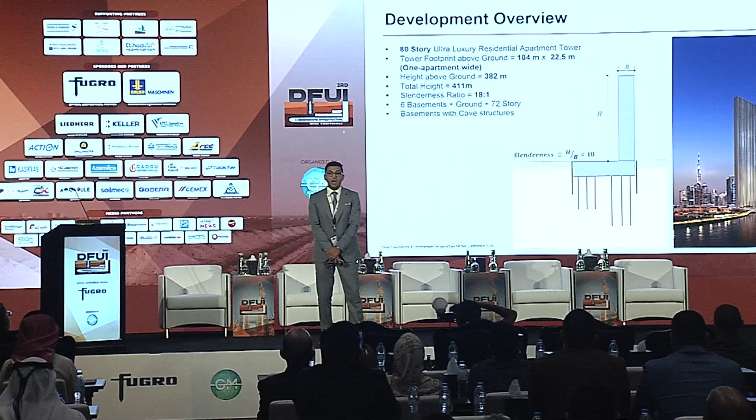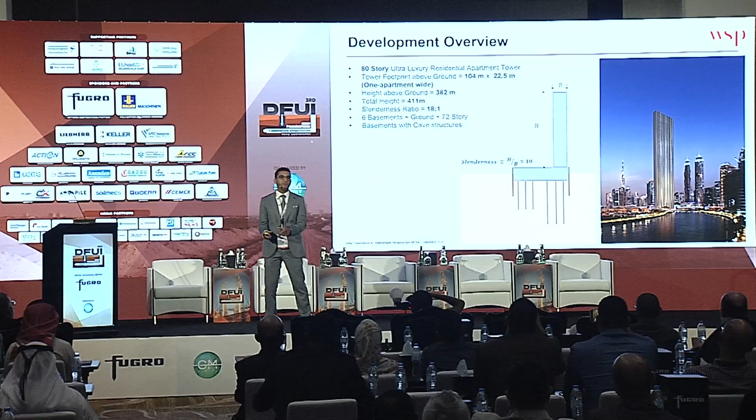As I keep saying that it's a very slender tower, let's define the slenderness, because I know this terminology isn't familiar to most of us here. From a structural perspective, slenderness is the ratio between the width of the building and its height - the height above ground level, because slenderness is actually a structural measure, not a geotech measure.

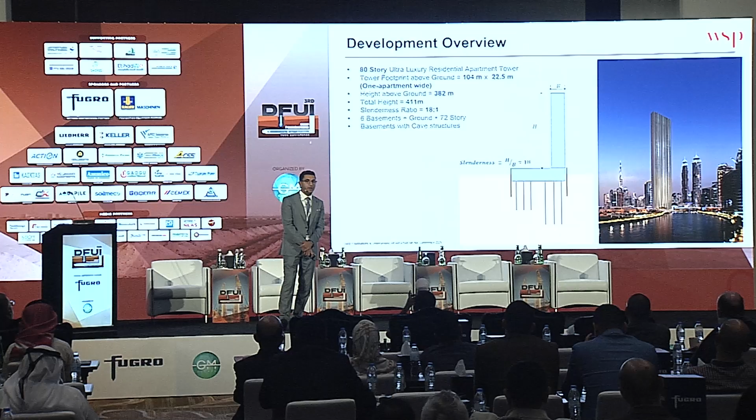So in our case here, it's 18:1. Let's put that into perspective and look at some of the key projects in the world and their slenderness ratios.

Now we move to the technical stuff. We'll start with the site-wide ground model. It's a very straightforward ground model. We were lucky as geotechnical engineers that the geology at this site was almost uniform, which isn't really the case for most projects, but we were super lucky here.

You can see that the foundation level is minus 26 meters DMD - that's the top of the raft on the right-hand side. If you look at the UCS, the unconfined compressive strength of the rock mass, it's situated in the weak rock zone.

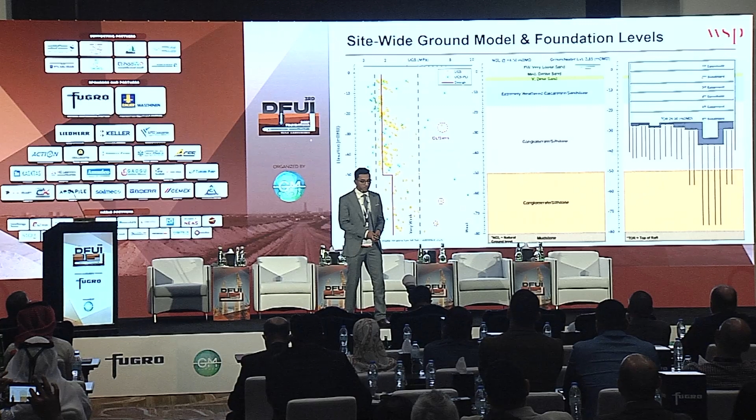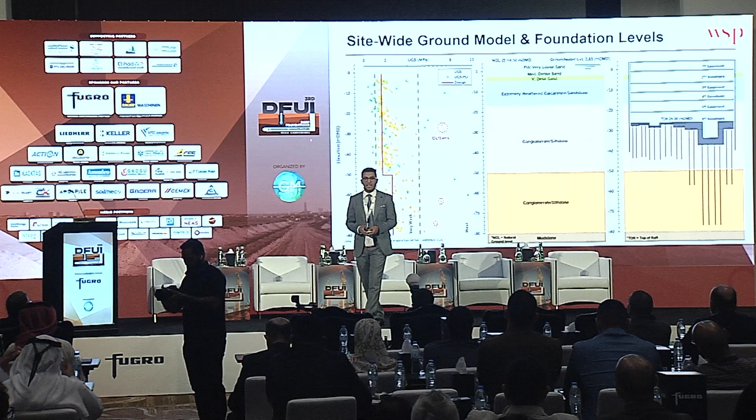So actually it's a weak rock. We're interested in 2 layers: the layer from minus 25 down to minus 50, and from minus 50 down to minus 85 and downward. Below that we're not really interested, but that's actually a very stiff mudstone layer.

So on the prelim design - it's actually a preliminary design, that's why it's handwritten - anybody who picked up that design and tried to design the foundation would of course think about the piles. Why don't we get to piles? As it's a prelim design, we need to first determine the length of the foundation we can use, and that's actually the standard practice we have here.

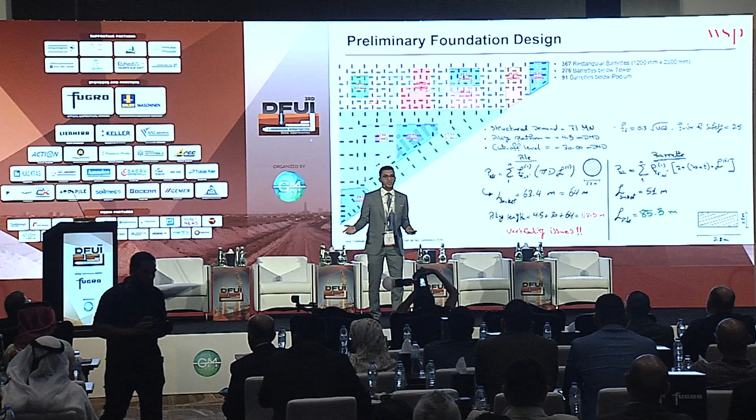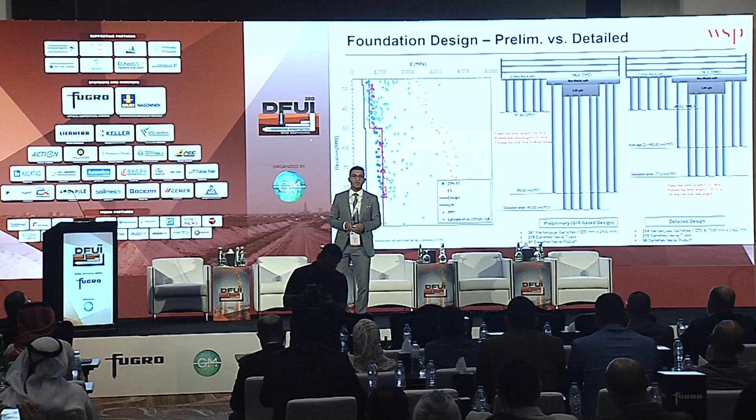This is one reason, and the other reason for going to barrettes will be explained later. In comparison between the prelim design, in the middle, and the detail design, under construction right now, on the right-hand side, you can see the prelim design has 367 barrettes, but the detail design has 314, which shows significant savings, not only in the number of barrettes, but also in the total length of the barrettes.

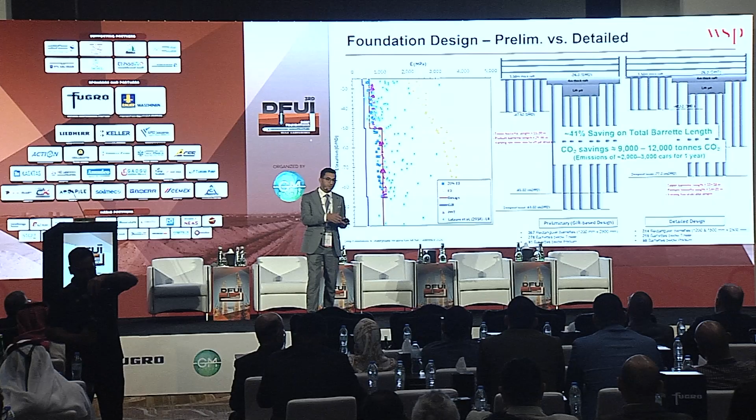In summary, we managed to achieve like a 40% reduction in the total piling or barretting length from the prelim to the detail design. Also in terms of environmental issues and carbon emissions concerns, we managed to save almost 10,000 tons of carbon emissions per year.

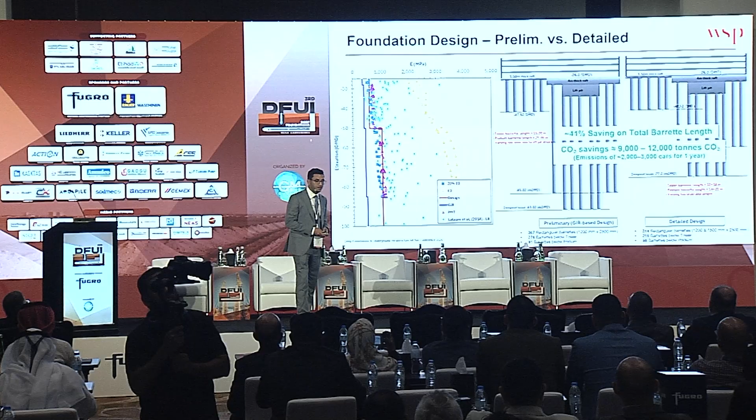So the question that can be raised right now is how we managed to achieve that, how we moved from the prelim design to the detail design, because there's a lot of savings in here.

So like many of the projects we do here in Dubai, we have PTBs. This is a mandatory requirement by the Dubai Building Code. So actually in our PTB program, we had two PTBs. We were concerned about the first PTB, which was 1,200 millimeters by 2,800 millimeters.

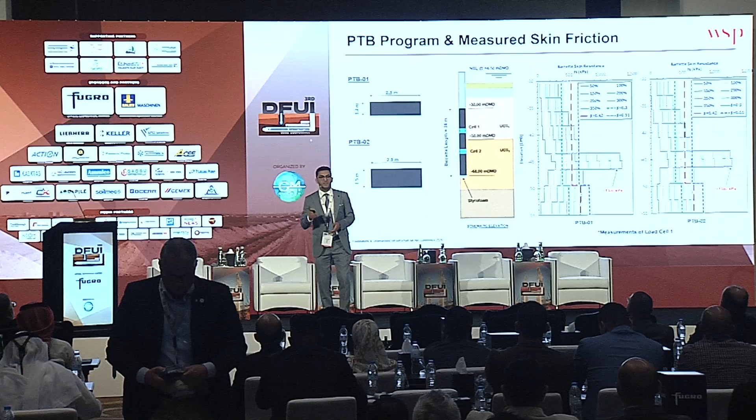We were concerned that we may encounter a certain overstressing that would require us to go for a greater barrette. So we added one barrette to the PTB program that you see here. We had two barrettes, but each one of these was instrumented using two O-cells.

And you can see on the right-hand side the measurement for load cell number 1, in the layer from minus 30 to minus 50.

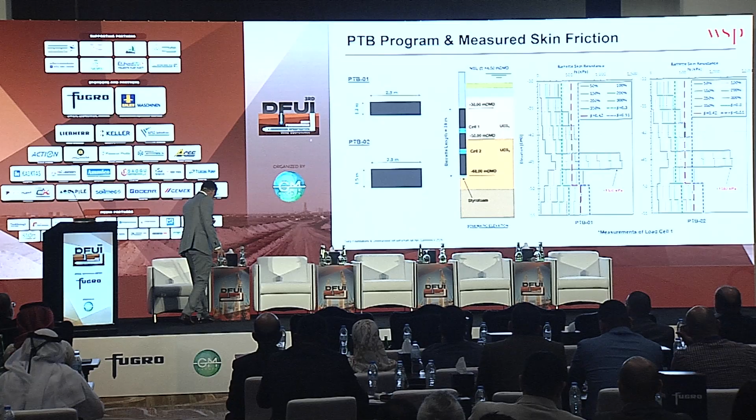Excuse me, I need to drink some water. I'm sorry. Apologies, the weather is hot and I'm kind of dehydrated. All right, so we can resume.

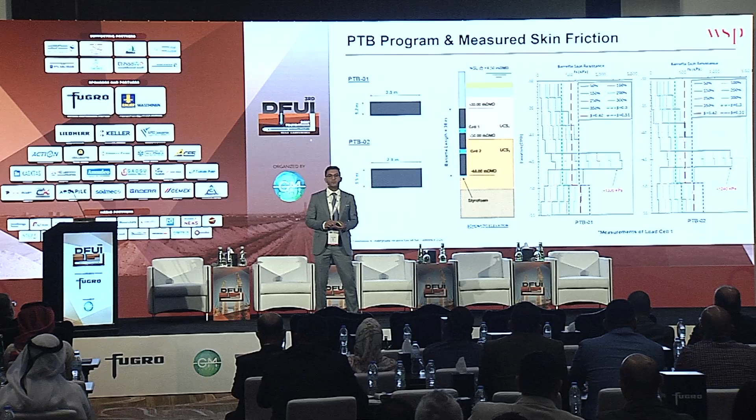So we had two PTBs on site. Each one of these was instrumented using two O-cells, and this is the raw measurements that you see. You can see that the skin friction mobilized inside is reaching 1300 and 1400, which is a very high skin friction to have mobilized on site.

I have a very long story to tell here, but I will try to summarize it as much as we can. So what you see here in red is the state of practice range for the ultimate skin frictions that most GIRs give. You can see that it's quite low compared to the maximum mobilized skin friction shown on top.

And yesterday there was a panel on over-conservatism, and this is one example of it. We cannot actually use the maximum mobilized skin friction because the mobilization of skin friction is dependent on the amount of load we have. So we had to define a state of geotechnical rupture, which is the skin friction mobilized at 300% of the load that the barrette was designed for. So these are the two points that you see here.

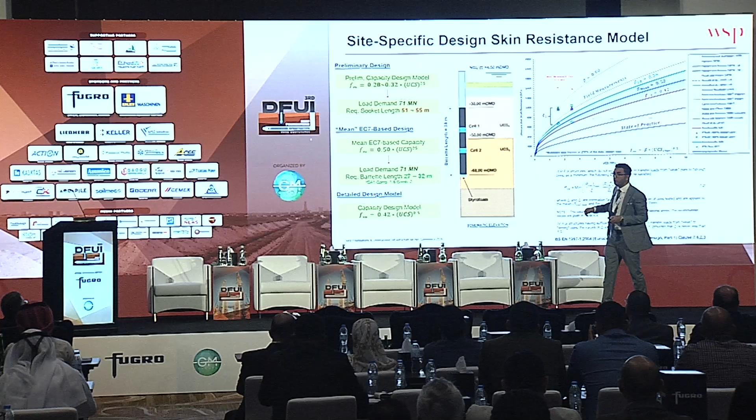The maximum mobilized skin friction is almost 1,000 kilopascals. If you apply the Eurocode factor, or the Eurocode methodology shown here, it reduces to two characteristic values. And if you try to fit these two points using the capacity model that we've been using in the market, it will give you, actually you can fit it using two capacity models. The first one is the lower bound, shown in red here, which gives a beta factor of 0.42.

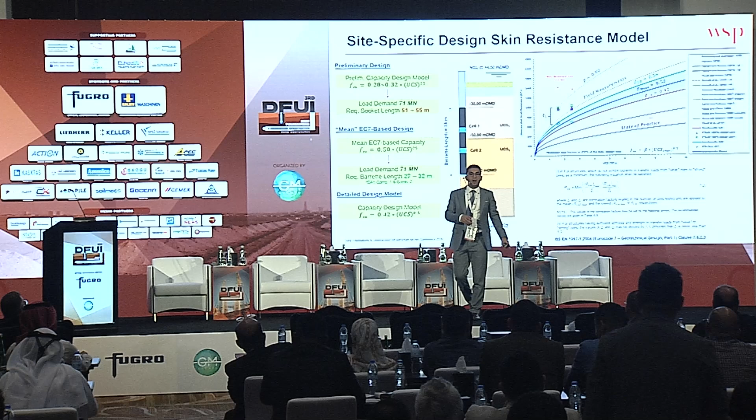And you can fit the second point, which is to the left, and it will give you a beta factor of 0.56. And if you take the mean out of these, you can use that for design, but it's going to be based on the Eurocode, and you have to follow the Eurocode convention for the design, so you can come up with a beta factor of 0.5.

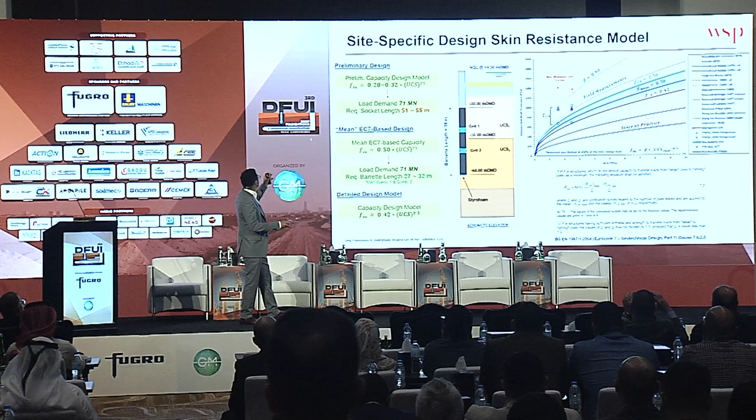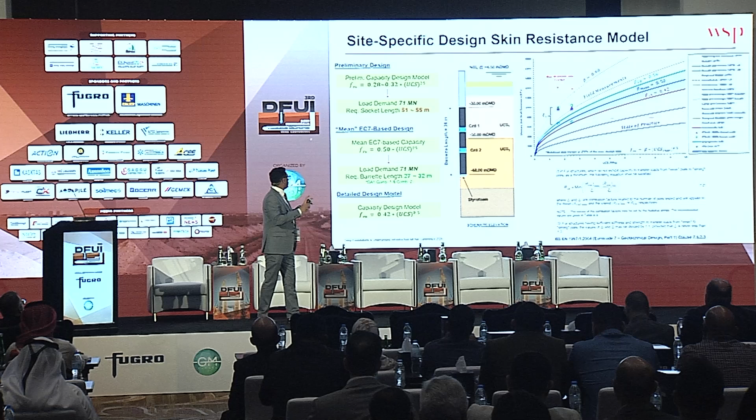When we started doing the design, the ultimate skin friction was computed as 0.28 to 0.32. That was mentioned in the GIR. With a load demand of 71 meganewtons, the required socket length is almost 51 to 55 meters. But with the mean Eurocode-based design of 0.5, it will give a length of 27 to 32 meters, depending on which design combination from the design approach number 1, because that's the one recommended here in the building code.

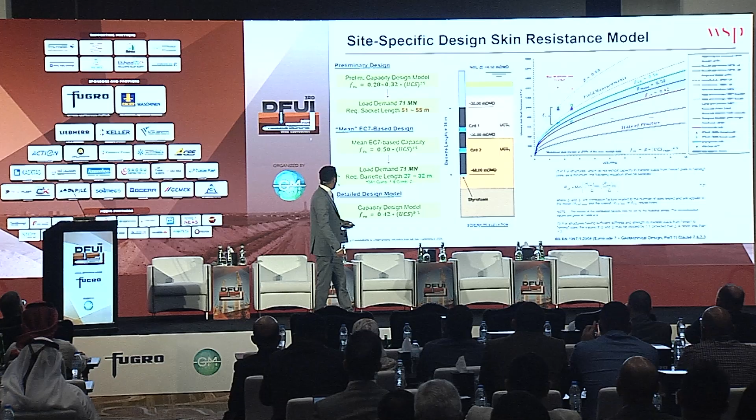But we ended up with a detailed design model of 0.42 times the square root of UCS. I'm not going to expand on this one because that's actually pretty detailed to explain here.

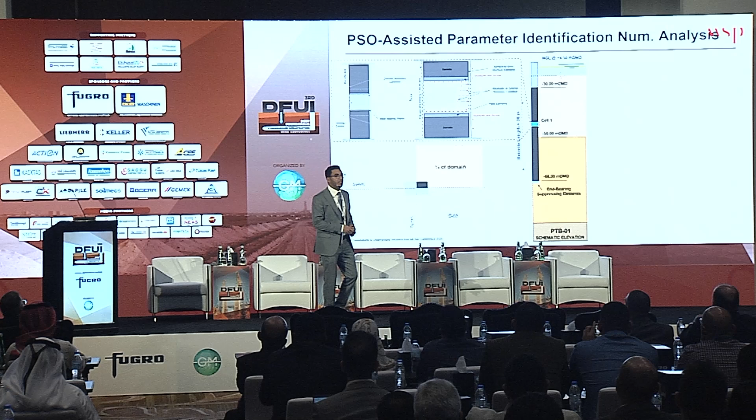This is a numerical back analysis for the ground parameters using the O-cell test. A numerical model was set up in Plaxis 3D, utilizing the symmetry that you see here, and using the boundary conditions along with that ground profile.

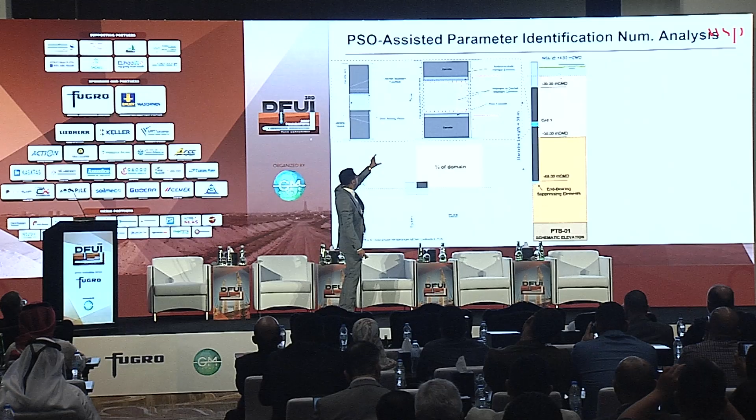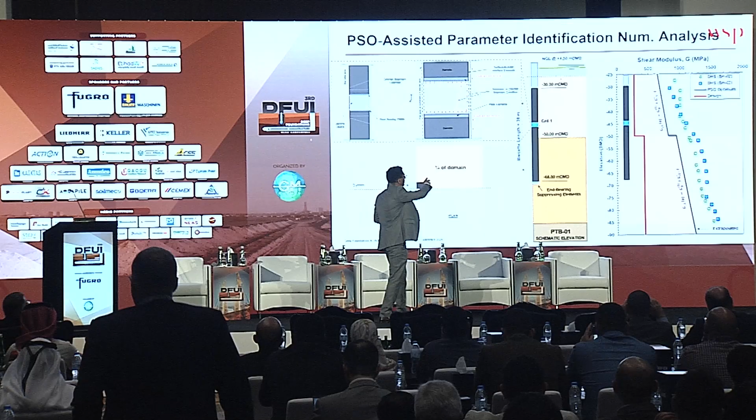We've done a lot of iterations just to reach what are the actual ground stiffness values we can use in our design. The discrete data you see is actually the small strain modulus that has been measured on site. The red one is the design profile that we have adopted. The black profile is the stiffness profile that was revealed by the back analysis. So the red one is what we concluded to use, and the actual one, I would name it the actual, is the black one.

Given that this is a super slender tower, the structural concern here is the lateral displacement of the building, because that's what the structural engineer really cares about. This is actually a geostructural problem, not just a geotechnical or structural problem.

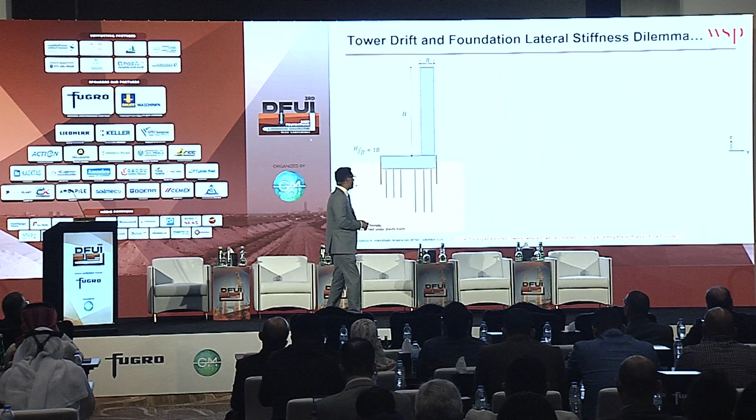So we have to do some analysis to come up with the lateral stiffness of these barrettes. But we first have to identify the most critical cases for the design.

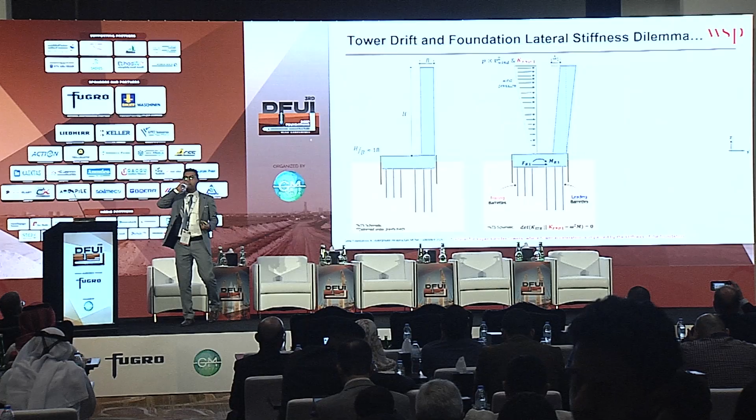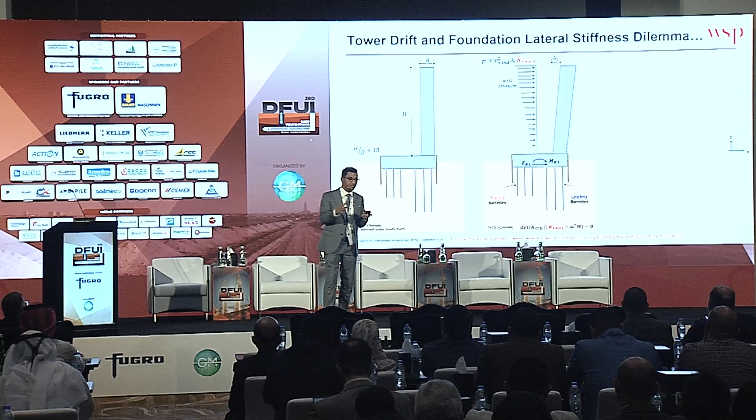So our tower is slender in one direction. It's very stiff in one direction, and in the other direction it's very slim. So we have two critical cases.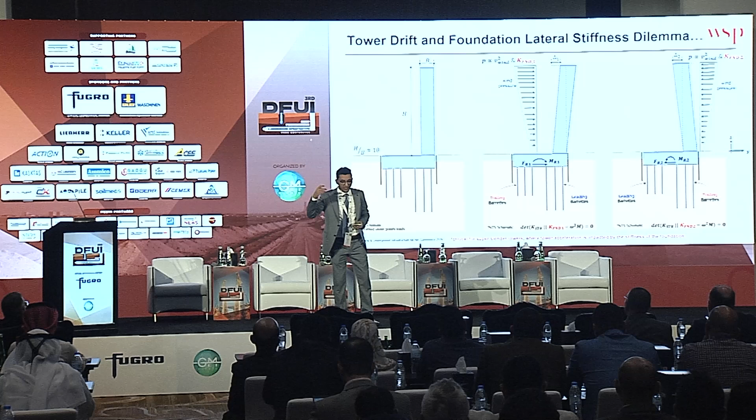When the wind is going in that direction, which is from the left to the right, the y direction, we can have a delta displacement as a maximum displacement at the top of the tower. If we reverse that load, the foundation behavior will be different, as you can see here.

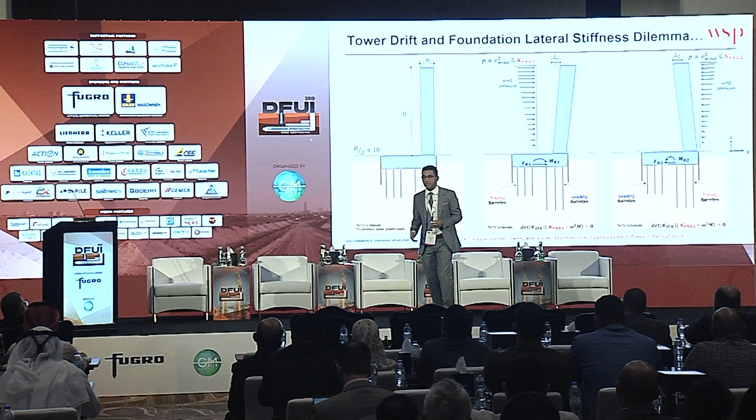The question now is how can we come up with that? Think of the loading as the building standing there with its own weight and some of the people living in there as a live load, and the wind loading coming over day and night. So if we think of that, it could be defined as this very simple problem.

So the building is there as stage 1, it's deforming under its gravity loads, and then the wind load comes. On the very right-hand side, this is the response or the reaction of the base due to only the wind.

One engineer could think of applying only the wind loads and computing the stiffness, but this is really true only if the foundation behavior and the soil behavior is completely linear elastic, which is not the case here. So we have to do something about it and do it in stages, simulating what's happening in reality. In one phase, we apply the gravity loads, and then we apply the lateral loads due to wind, and then we compute the stiffness.

But the question here is which stiffness are we going to compute? Is it going to be the force over displacement? That's actually not true, because somehow you have to compute the representative stiffness for the foundation response when the wind load comes. So it's going to be the tangent stiffness between phase 2 and phase 1, reflecting only the structural or foundation response when the wind load is applied.

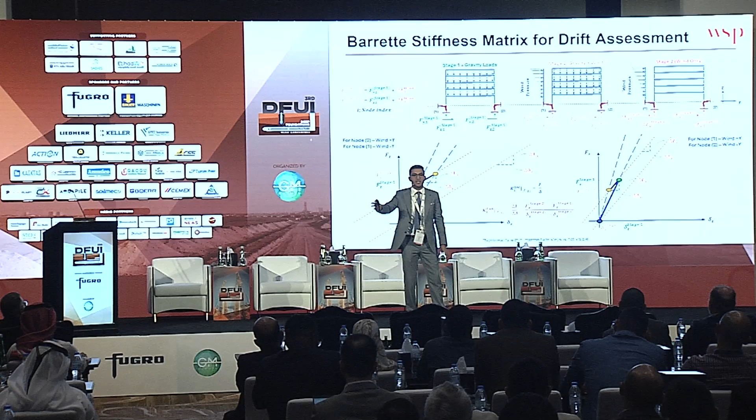What you see on the left-hand side, this figure, is very simple. It's drawn for two nodes in here when we have the load in that direction. But when the load is reversed, that approach is still going to be applicable and it holds valid.

So now we come to section number 4, which is settlement control and barrette design. So how do we manage to control the settlement with the assumptions on the soil structure interaction formulations that we have in literature and implemented in the software that we use on a daily basis.

Actually, we started with the plate and embedded beam model, and this is the model that we have developed over one of the stages. But one thing here that I want to highlight is the rotation of the local axes so that it could match with the principal axis of the section, because barrettes are not piles.

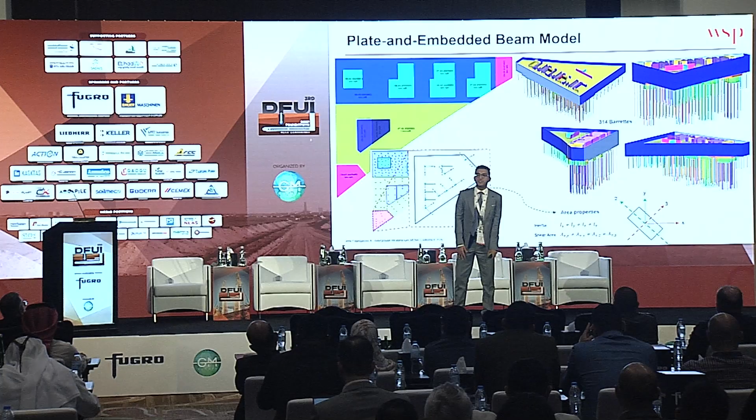A pile is a very good structural element where the inertia in one direction is exactly the same as the other direction. But when it comes to barrettes, you have two different, or actually infinite number of different structural stiffnesses, and of course an infinite number of different geostructural stiffnesses. So you have to align the inertia of that structural element with the local axes so that you can ensure the structural stiffness is properly defined and you get the most proper shear and bending forces.

But let's be aware of the embedded beam element. I'm not going to list all of the embedded beam element approach here, but I really admire the approach. It's been developed since 2004 and continues to be developed until today. Even in the next version of Plaxis, there will be a new embedded beam approach just to improve what we have today, because what we have today is actually limited. It's not addressing all of the soil structure interaction assumptions that we have.

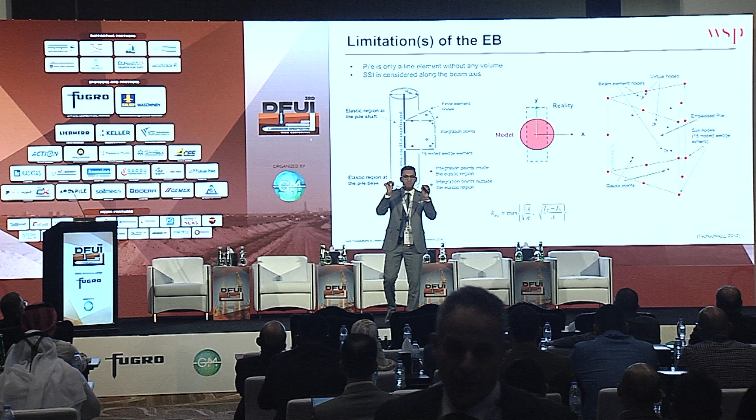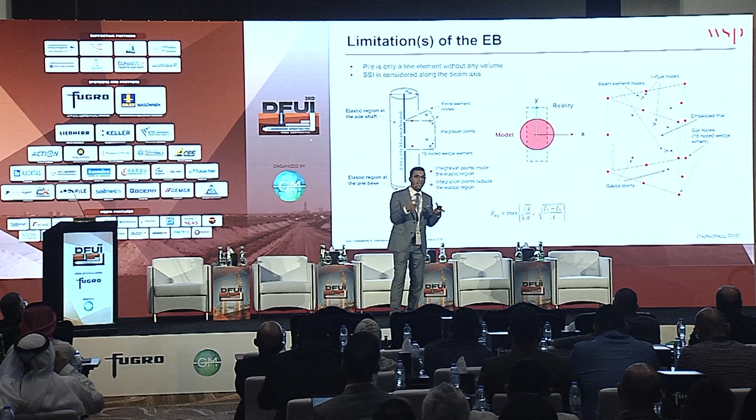The main assumption or limitation we should be aware of is that the embedded beam is just a line, and the behavior of that line, frame element, or beam element is coupled with the surrounding soil by discrete springs. Within the model, there's an elastic zone, and that elastic zone in Plaxis is assumed to be a cylinder. Meanwhile, in reality, it's not a cylinder—you can see it's actually a rectangle. So this is one of the limitations that we have to be aware of.

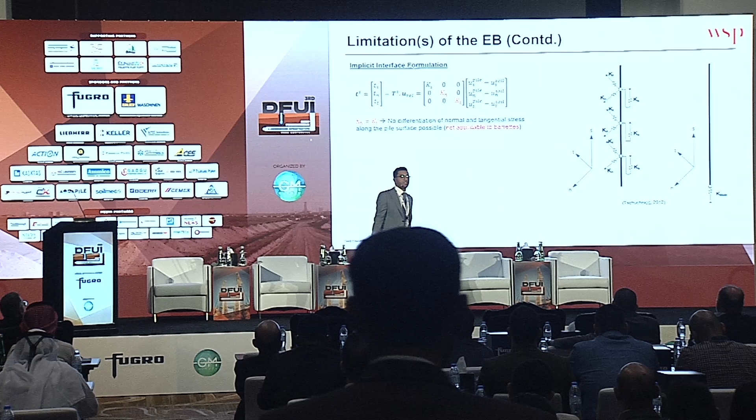And there's another limitation that is not really applicable for barrettes, which is the axisymmetry of the assumptions on the soil structure interaction. That could be actually valid for piles, but not really valid for barrettes.

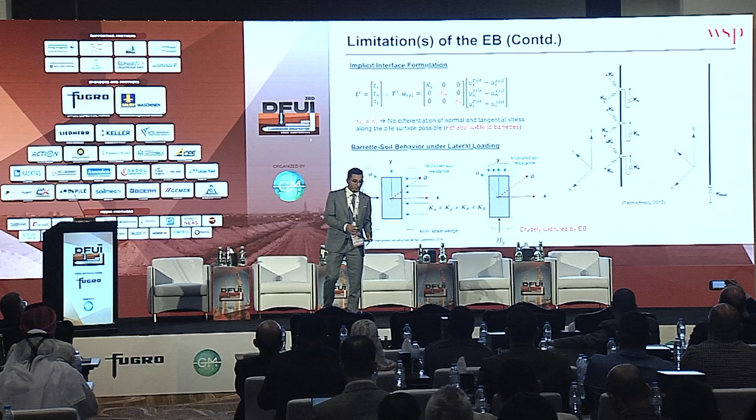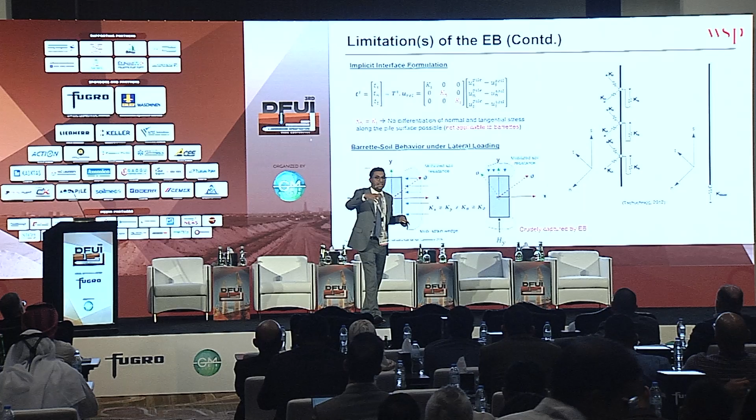Let's have a look at barrette soil behavior under lateral loading. If you have a barrette and try to push it laterally in one direction, you will get a displacement under a certain force. But if you reverse the direction of the force to be normal to the first one, it's going to be a very different behavior. The embedded beam element cannot really capture that.

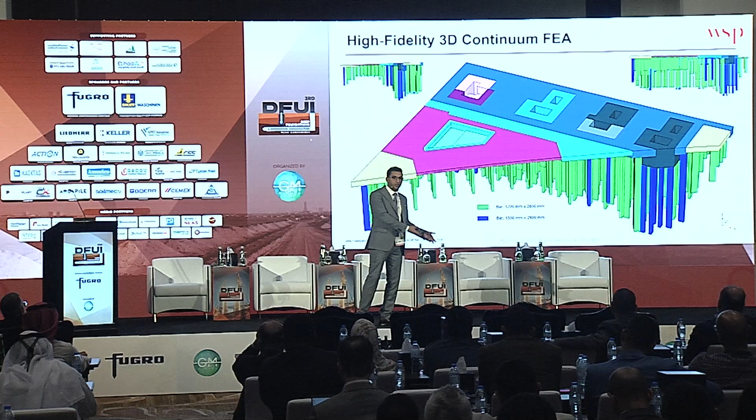So what should we do? We have to get back to the fundamental or standard modeling approaches of geostructures, which is modeling things as continuum. We had to develop that model just to verify our assumption on what we had done using the embedded beam—is it going to be really conservative, or is it valid? So we developed that really complicated model.

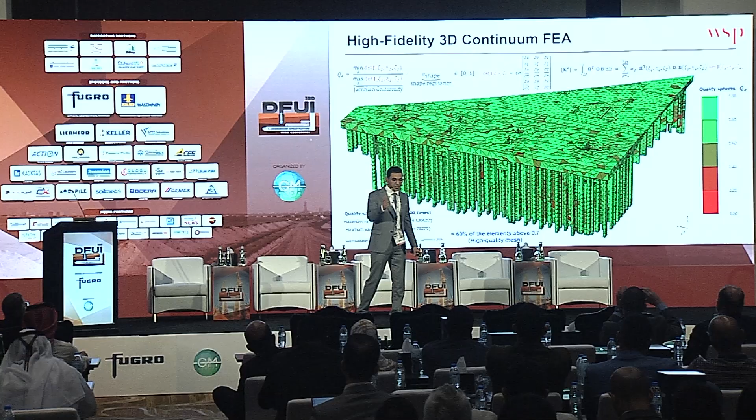And we had to ensure the quality of the finite element mesh, because it really matters here. Plaxis defines the quality of the mesh as a ratio, which is the Jacobian of each one of these finite elements. We care about the quality because it affects the formulation of each one of the finite elements in this problem. The finite element mesh that you see is quite high quality, because 60% of the elements achieve more than 70% on the quality measure.

Drink some water again.

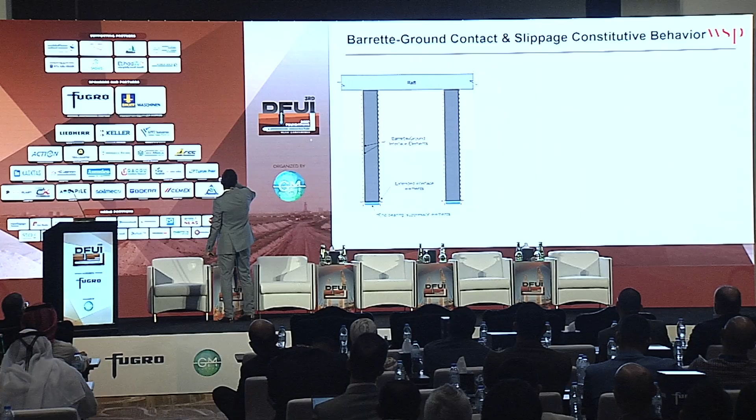One of the fundamental assumptions in the embedded beam element is a certain formulation prescribing how that element interacts with the ground. But actually, in this case, it's really different. You have to prescribe the interaction of the element you're putting in the ground with the surrounding soil.

So this is a schematic showing what we have done. If you have a barrette element, you have to include some interfaces, but you have to do something really special about these interface elements. It should be slightly extended for a reason.

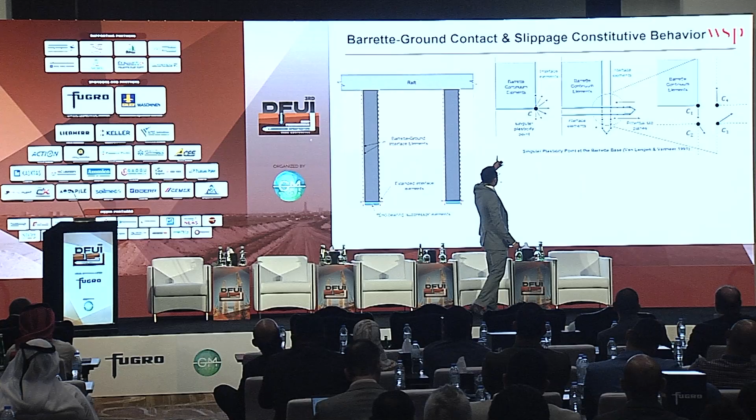As a matter of fact, the stresses in the finite element are discontinuous, unlike the deformations, which are really continuous and smooth. That point, which is at the pile toe, if it's not actually split into 4 points like the one you see here, you're going to end up with a stress overshooting, and that will overshoot your pile capacity.

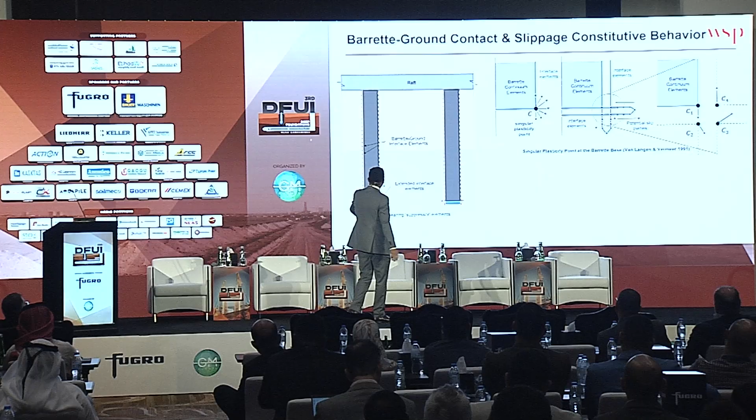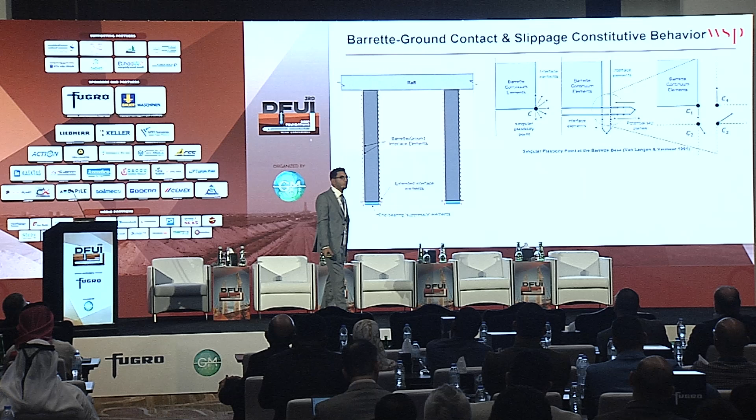So we had to extend the interfaces, as you can see using the scheme here. And also, just in line with local practice, we had to introduce some elements at the toe so that we can suppress the end-bearing resistance of these barrettes.

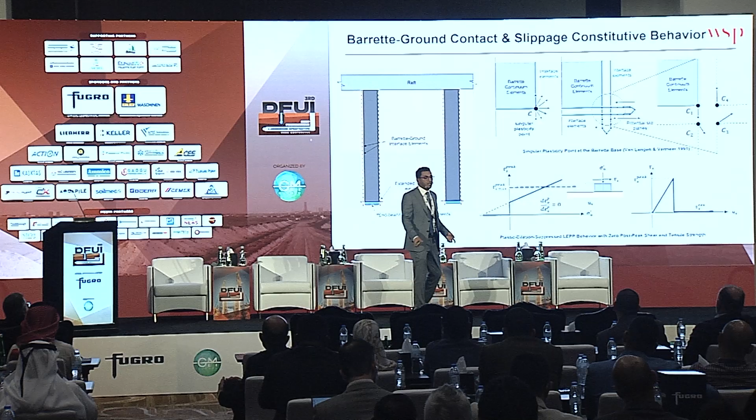And this is actually conservative. One of the things we should be aware of: you cannot control the actual pile capacity or barrette capacity when you're modeling as volumes. But if you're really concerned about that, you can use that material model in gray. It's very simplified, and you can put the maximum skin friction that could be mobilized in that element.

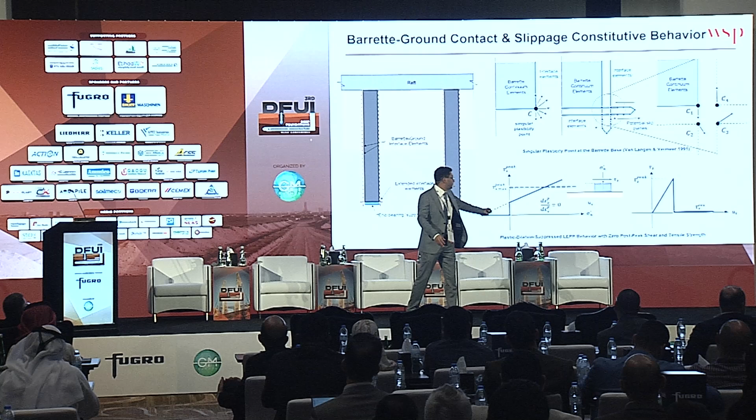If you're not really happy with that, I've selected the one drawn in blue, and I verified that the maximum skin friction mobilized in that model is actually less than what we had in the PTP.

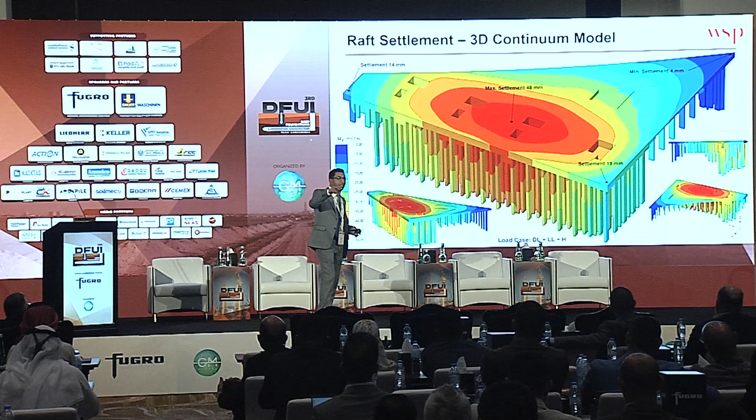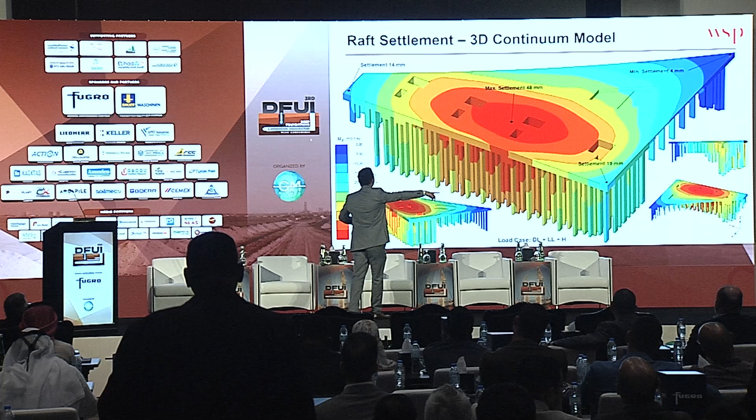Regarding the settlement, you can see that the settlement is 48 millimeters. That's the maximum one, and it's more or less at the center of the tower. The minimum settlement is at the corner, this is the podium, and it's 4 millimeters. You can also see the settlement in that direction is 19 millimeters, and here it's 14 millimeters.

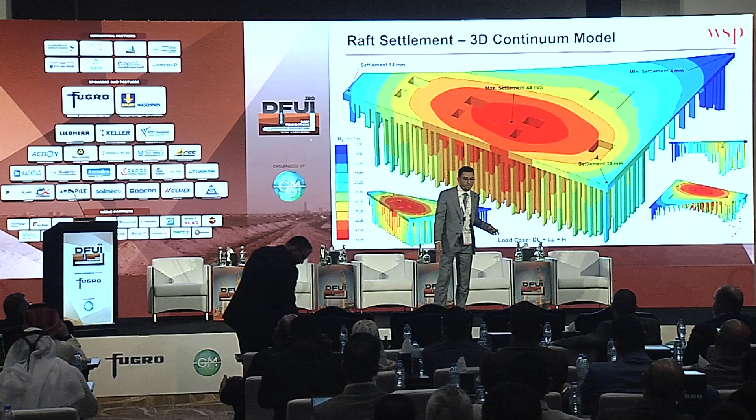And of course, we need to verify what we did initially using the embedded beam, which I've explained the limitations of. So let's put things into comparison. I'm sorry the title is not really correct - this is the raft settlement, embedded beam versus the continuum model you see down there.

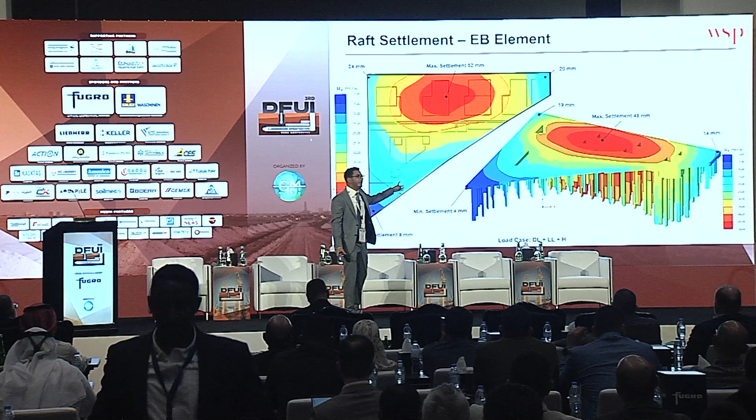The embedded beam element, we know, is conservative. There are some assumptions, and these assumptions reveal themselves on the conservative side - the maximum settlement is actually 52 millimeters compared to 48. This one satisfies the limit dictated locally, and this one actually does not.

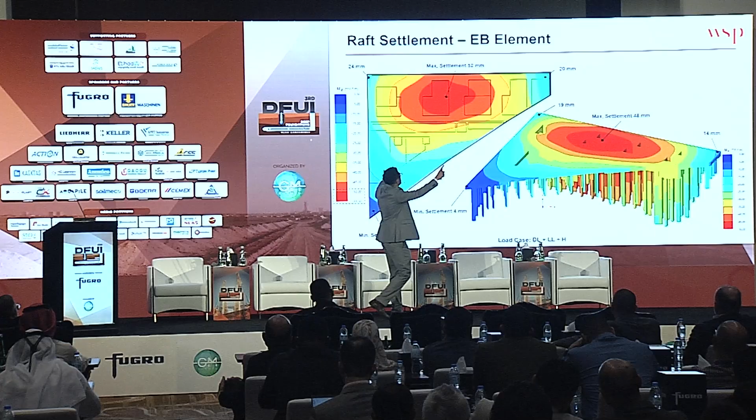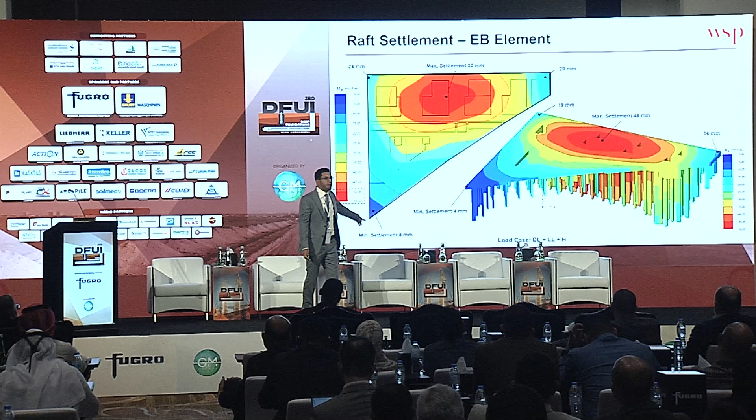And on the corners of the tower, you can see the maximum settlement predicted by the embedded beam is 20 millimeters, but the one with volume elements is 14. Also for the podium, the minimum settlement predicted by the embedded beam is 8 millimeters, meanwhile for the volume elements it's only 4 millimeters.

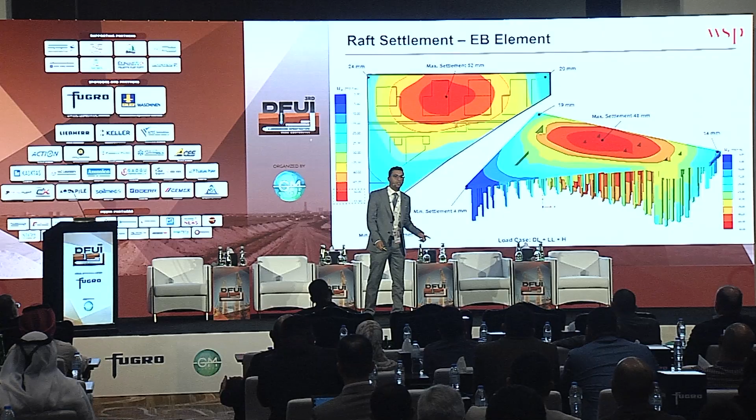But actually, the question I see some people asking right now: did you use that model to verify the straining actions that you get in the barrette? That's actually true, we've done that.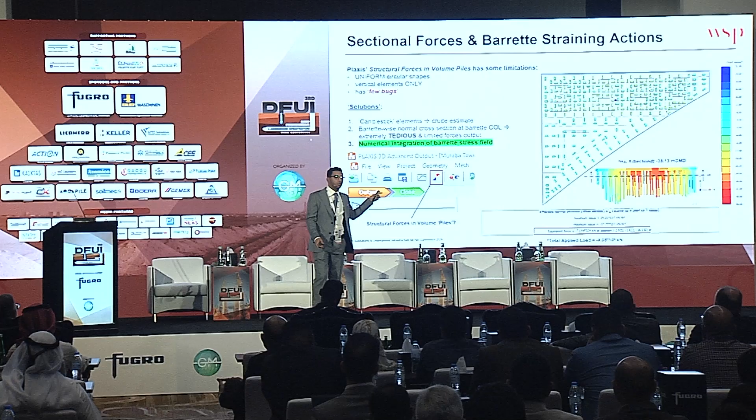As far as I admire Plaxis, I've been using it for almost 10 years, but every software we use has limitations or assumptions internal in that software. To retrieve the structural forces from Plaxis using that tool you see down there, it has certain assumptions and limitations. The first limitation: your pile or geostructural element has to be uniform and circular shaped, and it applies only to vertical elements.

If you have an element that is inclined or raked pile, it's not going to give you really correct results. So what's the solution? You can insert a very weak element in the middle, and that will give you the forces - of course, it's going to give you the axial force correctly only if the element is vertical.

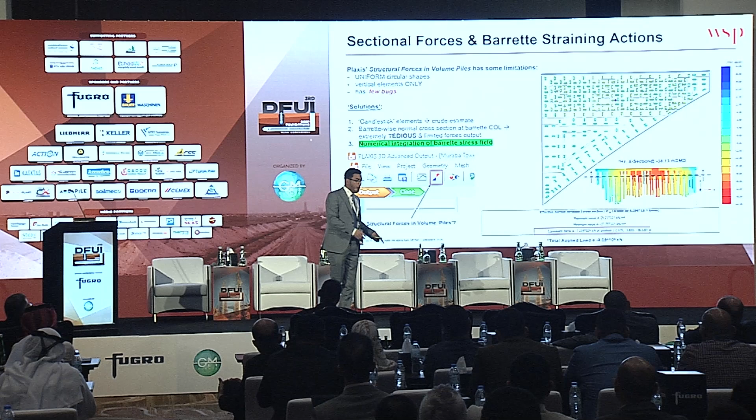But it's not going to give you the right results for the bending or shear forces. The other option is you can take a cross-section at the barrette cutoff level and compute the resultant forces, because Plaxis is reporting that, which is the right-hand side figure you see. But you'll have to do that for each and every barrette, which is 314 barrettes - over 1 week. I don't think that's really practical.

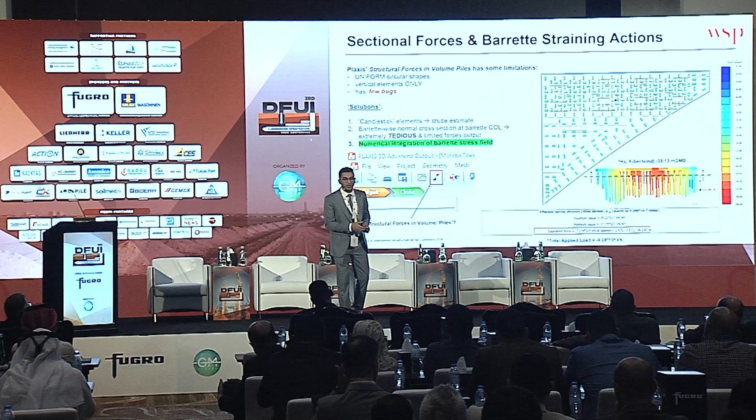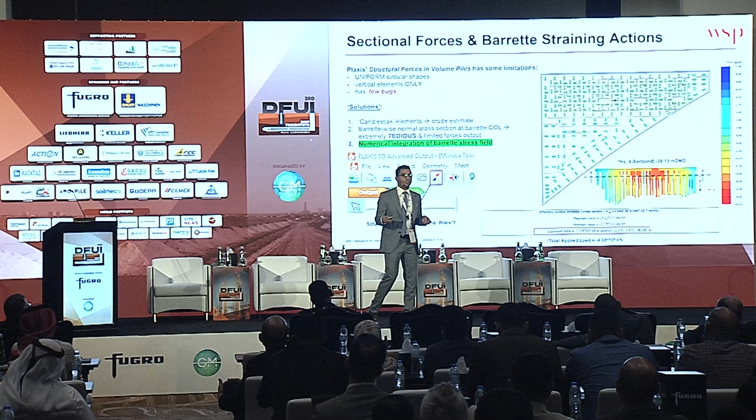The third solution is the proper solution for this problem. You can read the finite element mesh, read the location of the Gauss points and the stress tensor at each one of these points, and do some numerical integration on these stresses to compute the forces you need to verify your reinforcement against.

So what you see here is a complete algorithm specifically developed for this problem so we can compute the forces. I'm not going to explain it in detail, but think of it as: you have a finite element mesh over a certain volume, you take multiple cross sections, and over this section you compute the resultant force and the moment of that force about the centroid of that cross-section, which can be easily computed using the boundaries of that cross-section.

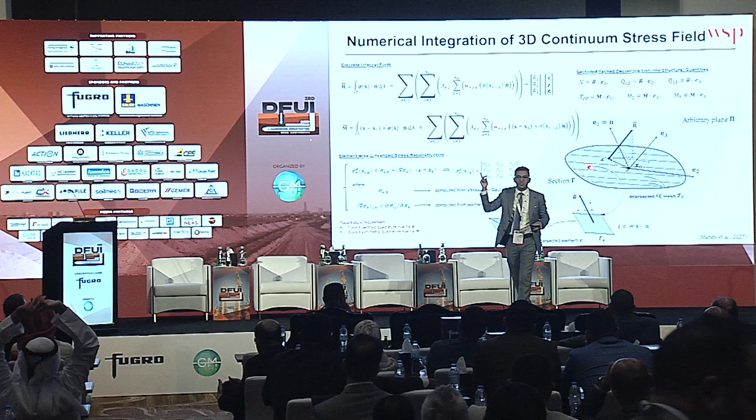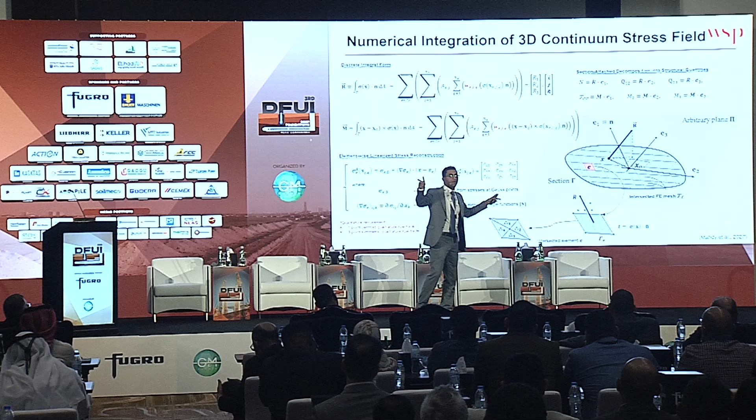On the right-hand side, you can see that if you compute the resultant, and you know the orthonormal basis - the local axis orientation with respect to the global axis - you can compute the straining actions and take it for the design forces. And if you have the resultant moment of that force, you can compute the moment. The math looks really fancy.

I like it, I really admire it. But does it really work? Of course it works. But let's make things really simple.

So we take just a column that is 30-meter high with the same dimensions as the barrette. We fix it at the boundary down there and apply some forces. From these forces we can compute the axial force, the shear force, and the bending moment by hand - it's actually a problem an undergraduate can handle.

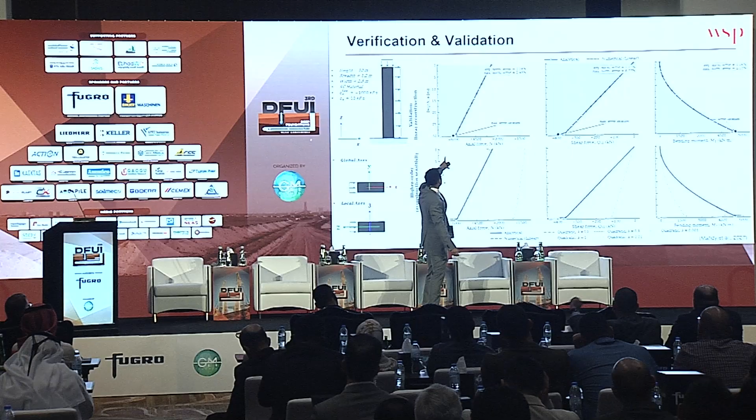If you look at the top figure - let's forget about the figure down there - you can see that the axial force, the numerical, which follows the algorithm that's been developed, and the analytical, are exactly on the same line. It's the same thing. And if you compare the shear forces, it's exactly the same thing, and also the bending moment.

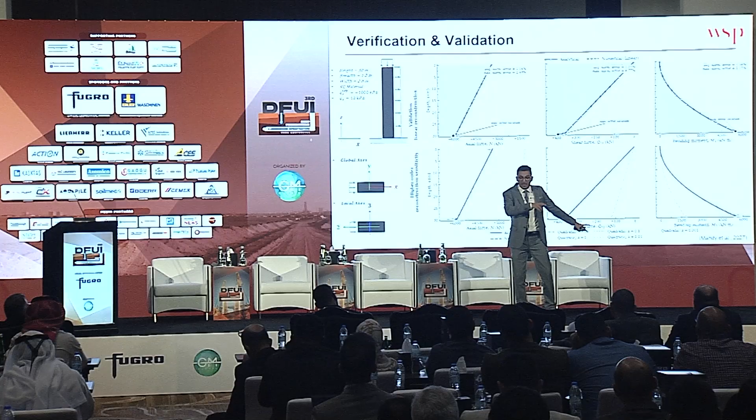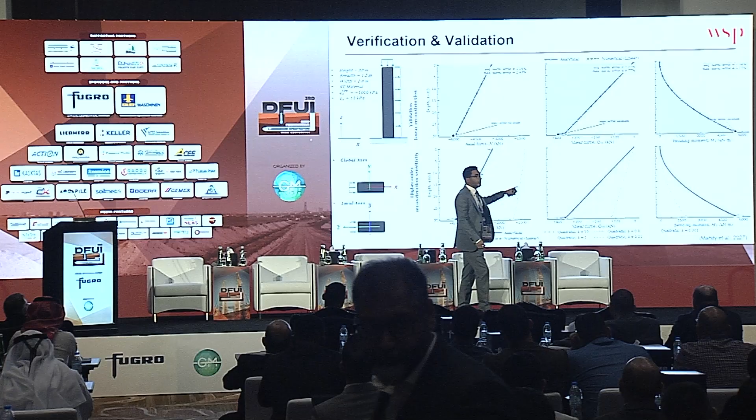By the way, the bending moment here can be computed by hand, which is W, the intensity of that load we applied, times the height to the power of 2 over 2. It gives you exactly the same value down there at the point of fixity, or the surface of fixity, that we applied.

So the conclusions and takeaways: for slender towers, you need to coordinate closely with a structural engineer, because you need to verify any assumption. If your foundation just moves 1 millimeter down there at the bottom, and the stiffness of that structure compared to the height is actually very low, the structure will sway - that millimeter will become a very, very high lateral displacement when you reach the top of the building.

And for value engineering, we have managed to save at least 40% of the preliminary design, which means millions of dirhams in savings. You can always use high fidelity numerical analysis just to verify your design assumptions or limitations, in other words. Thank you.